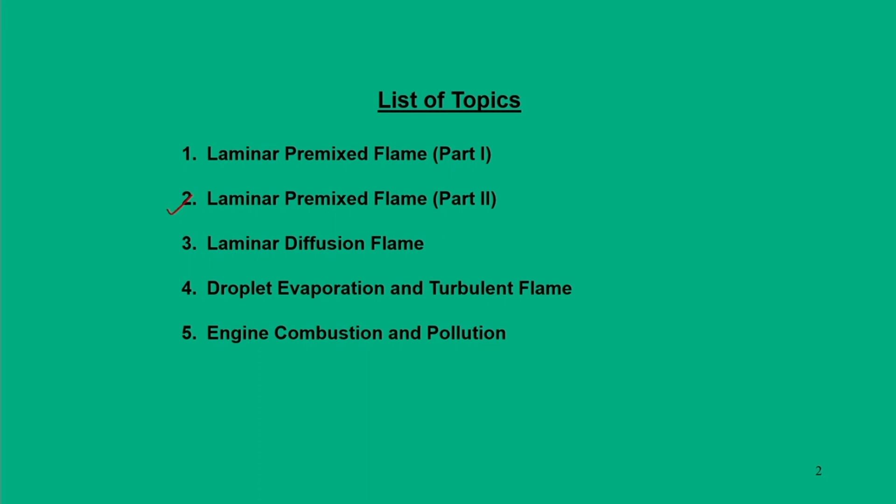In the first lecture of this module, we discussed laminar premixed flame part 1. Today we will move on to important aspects of laminar premixed flame part 2. In lecture number 29, we will discuss quenching, flammability limit, ignition and flame stabilization. The viewpoint of this lecture is that we expect the flame to be self-sustained, meaning the flame whose thickness is very small carries forward the mass and fuel reactions further if it has to be self-sustained.

At the same time, so that we can use it for a variety of applications, we should not be in a position where the flame creates any hazardous situations. One such situation is explosion. In some cases flame travels much faster, so to control those conditions we also need to know what is quenching. We should design our burners such that the flame moves forward, it should not come backward. There is a parameter called quenching distance.

Second thing is flammability limit. We should know that for a given fuel-air mixture, what is the range of equivalence ratio - minimum which is in the lean range or maximum which is in the rich range - during which the flame is able to sustain. So we should know the flammability limit.

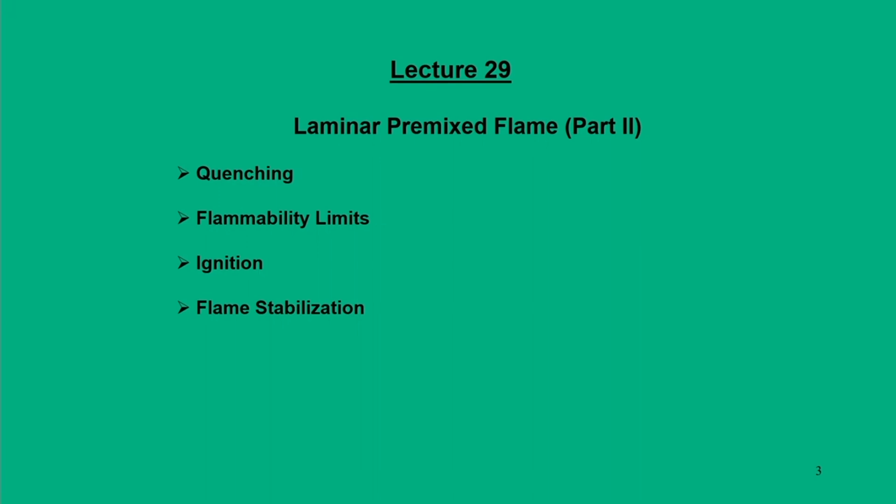Third point is ignition. If you have fuel and air without some kind of ignition, meaning we are not adding enough energy to the fuel for its combustion to happen, ignition is required to ignite the fuel and air mixture. After knowing all these things, we also expect the flame to be in a stabilized mode, meaning we make use of this flame for combustion applications only when we are very sure about the stabilization of the flame, which gives hazard-free operations.

So let us discuss them one by one. The first thing we will discuss is flame arresting methods, which means we should know under what circumstances the flame should not propagate further. If we know these conditions, it is possible for us to design suitable burners and avoid dangerous situations such as explosions. If you know how to arrest the flame, then we can extinguish the flame as and when required.

There are many techniques by which flame can be extinguished, such as when you allow the flame to pass through a narrow passage. While the flame enters a narrow passage, the fuel and air mixture does not have sufficient quantity. If they are unable to pass, then the flame terminates then and there.

In other cases, like addition of diluents - if you add water into fire, the fire stops. Addition of diluents causes primarily a thermal effect. Also, addition of suppressants like halogens alters the chemical kinetics. So all these things - we can add chemicals to the flame so that we can extinguish it.

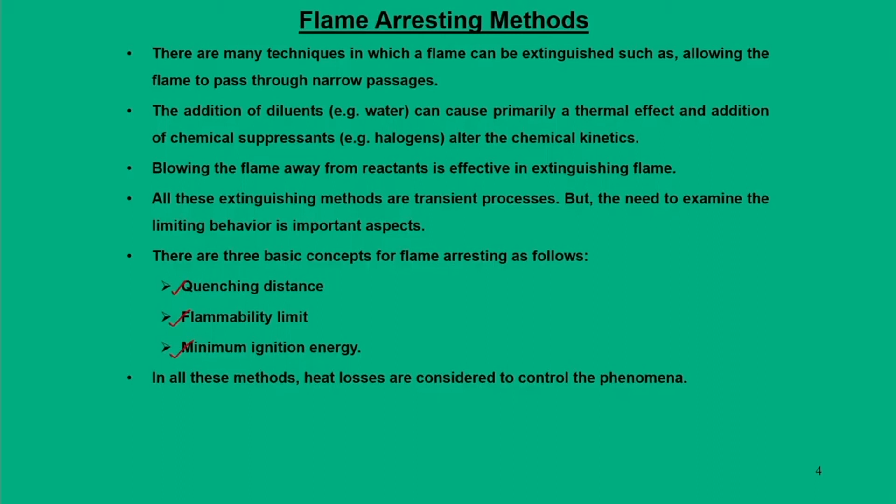Another way is simply blowing away the reactants, which is another method of extinguishing the flame. In fact, all these extinguishing methods are transient methods, but we need to examine their behaviors. To do that, we need to know three basic concepts: first is quenching distance, second is flammability limit, third is minimum ignition energy. These three parameters are vital for two dual purposes - we should avoid dangerous situations if we know how to extinguish the flame, and also we should be able to create an environment for flame stabilization. So for both scenarios, these concepts are very important.

So let us start with the first thing, which is called quenching analysis. The first parameter of flame extinguishing is quenching. In general, flames extinguish upon entering sufficiently small passageways, and if it is not too small, the flame will propagate further - meaning the flame has sufficient strength, or the air and fuel mixture has sufficient strength or pressure to move further. When you look at these flames, there are basically two types of burners: one is slot burners, which have a square or rectangular cross section, and the other conventional way is circular tube burners.

If you stick to a circular tube, the critical diameter of the tube where the flame extinguishes rather than propagates is known as the quenching distance. So basically, the quenching distance is defined as the diameter of the circular tube where the flame extinguishes.

Flame extinguishes means that is the minimum diameter of the tube that should be there so that the flame should extinguish. I will talk about the importance of this extinguishing at a later point in the slides. Based on this quenching distance, we can determine whether the flame is stabilized above the tube or flashes back. This is important because by the quenching distance we can visualize that the flame should propagate and should not traverse back through the tube, because when it traverses back it can come back to the location where the fuel-air mixture or source of fuel is.

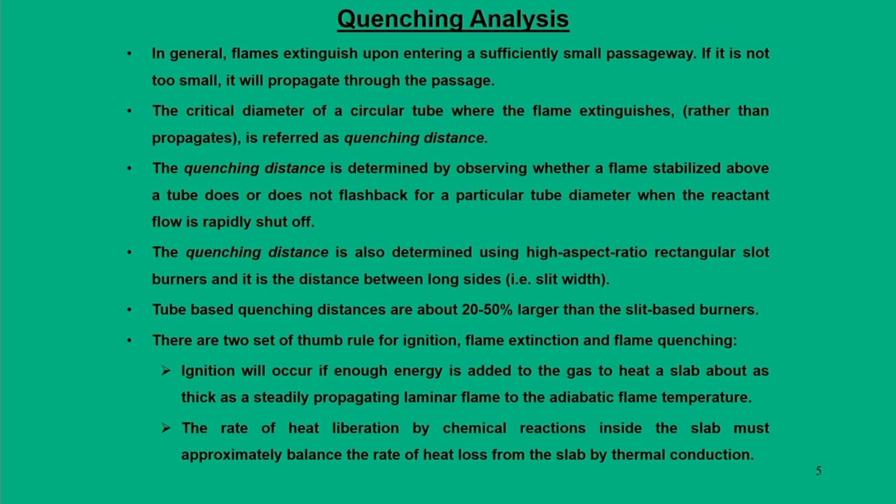With this concept, let us give some mathematical insight into the quenching distance. If we refer to this figure, we are looking at a flame that enters the slot of diameter d, and this flame has thickness delta. So this we say is a flame.

Within this flame, the entire volume in which the flame is produced, and all the energy generated within this volume, has to be dissipated through the slab, or to the walls of the slab, through conduction. Then we define the adiabatic flame thickness — when the flame has reached maximum temperature — as delta, and the quenching distance d can be calculated that satisfies the criteria of heat balance.

This quenching distance of the flame is always greater than the flame thickness. So if you see, the flame thickness is delta, and this quenching distance, which is d, has to always be greater than delta. This is the first criteria.

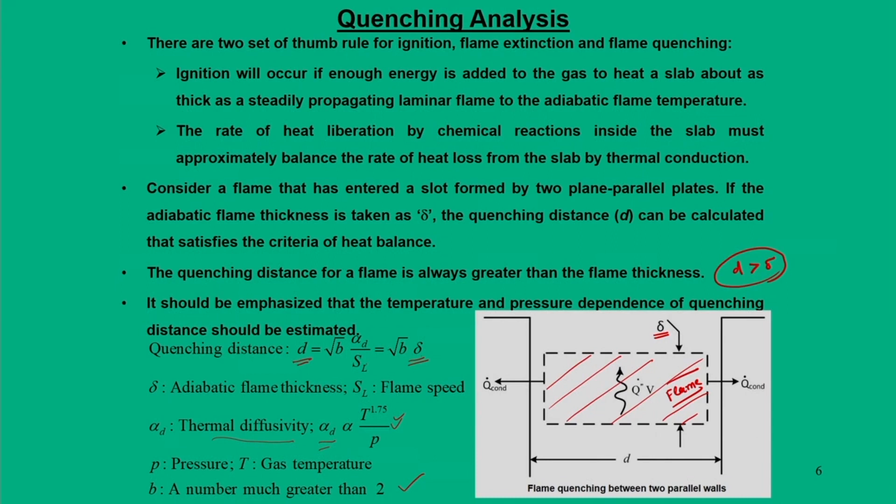The next aspect we are going to discuss is the flammability limit. We know that a mixture is rich or lean, and that is decided by the equivalence ratio phi. Equivalence ratio decides whether the mixture is rich or lean. We should also know that during this rich or lean mixture, what is the range within which we can have a self-sustained flame, and that parameter is called flammability.

For example, if phi is the equivalence ratio, there is a lower limit phi minimum and an upper limit phi maximum, and this is what we call the flammability range. The minimum range falls in the lean zone and the maximum limit falls in the rich zone. So for a given air-fuel ratio or equivalence ratio, we have a flammability range by which we can decide whether we can have a self-sustained flame or not, and that range we call the flammability limit.

The lower limit, phi less than 1, allows steady flame propagation, the upper limit, phi greater than 1, is the richest mixture. The flammability limit is quoted by the percentage of fuel by volume in the mixture or percentage of stoichiometric fuel requirement.

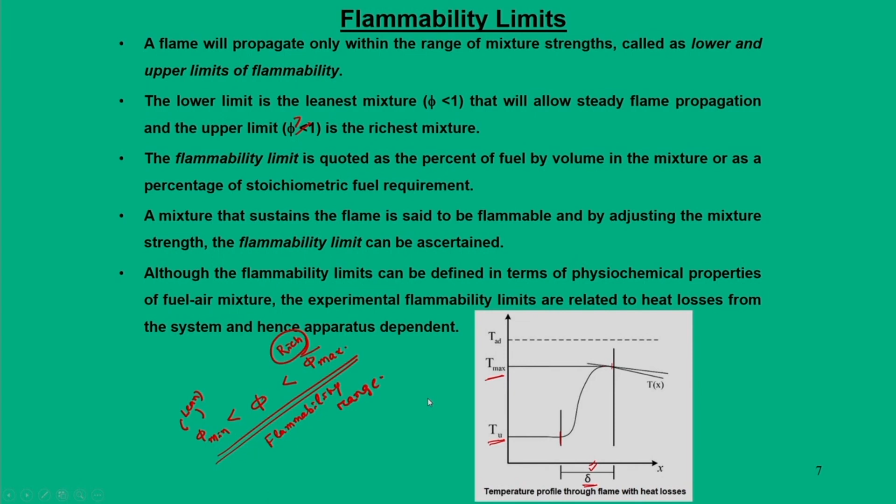After this we can clearly see a drop in temperature, mainly due to the cooling of the gas, meaning heat is lost by conduction from the flame. The cooling product gas creates a negative temperature gradient at the rear of the flame zone, which means heat is lost from the flame.

When sufficient heat is removed, the quenching criteria is satisfied, so the flame ceases to propagate, meaning it does not move further. If more and more heat is taken away from the flame, it does not have the strength to propagate further, so it extinguishes. The flammability limit decides the maximum temperature the flame can attain, and at the same time whether a sustained flame can remain or not.

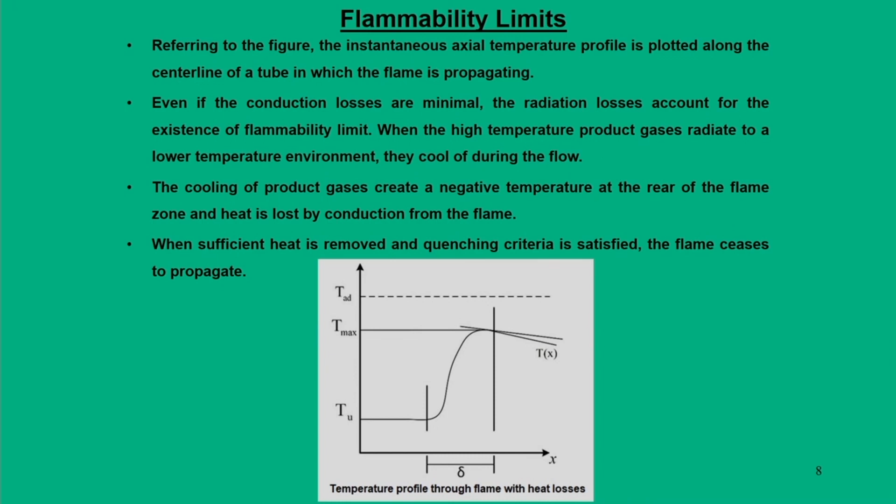The next important topic of discussion is ignition. The act of causing a fuel and air mixture to start burning is referred to as ignition, and we normally refer to ignition with respect to spark. In spark ignition engines, there is a spark plug through which we ignite the fuel. This ignition is impulsive in nature; all of a sudden, within a very small period of time, we dump enough energy into the fuel so that it can ignite.

When ignition takes place, we say that we have added enough energy to the gas for producing a steady propagating laminar flame. Because of this we introduce the concept of minimum ignition energy. In a simplified analysis, we consider a situation with a spherical flame within which we generate a certain amount of energy, and that energy has to be taken away, which we call Q conduction.

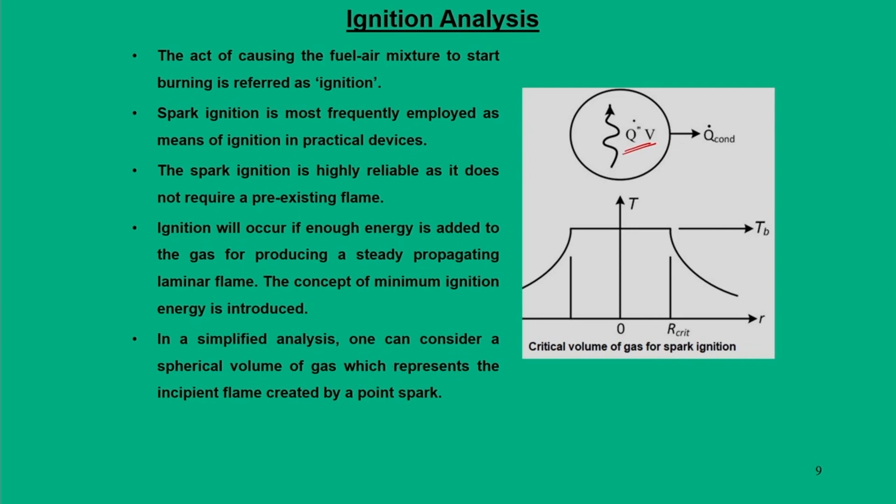So what we are looking at is whether by creating the spark we are able to give sufficient energy. To do that we can find a critical gas volume radius, defined such that flame will not propagate if the actual radius is smaller than the critical value. In other words, for a flame propagating situation, it has enough energy to propagate further, while there is heat loss from the flame through conduction. So a balancing approach is to find a critical volume radius at which the flame will not propagate further.

That analysis gives us the amount of energy, which we call the minimum ignition energy, needed to be supplied by the spark to heat the critical volume of the gas from its initial temperature Tu to the flame temperature Tb. So we can define this minimum ignition energy expression.

There are mathematical treatments available in the book, but what I have taken here is the end result. For a spherical gas volume we find the critical radius, which is a function of the thermal diffusivity alpha, flame speed, or in other words expressed in terms of flame thickness. Based on this we also have expressions for minimum ignition energy, given by: 61.6 times P Cp by Rb, bracket Tb minus Tu by Tb, into alpha d by Sl to the power 3.

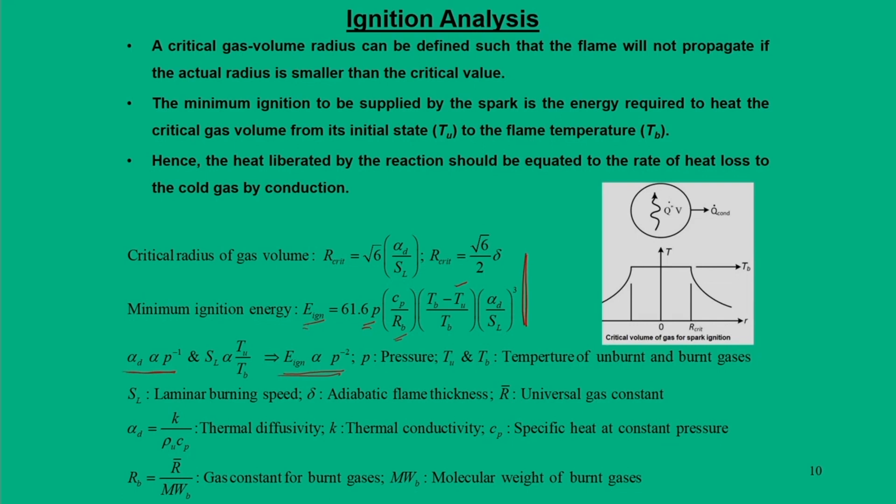From these expressions, the important thing is that ignition energy has a direct dependence on pressure, but an indirect dependence on alpha d. Experimental observations show alpha d, thermal diffusivity, is inversely proportional to pressure, and from this we can say ignition energy is inversely proportional to the square of pressure. So higher pressure means less ignition energy, meaning the flame has sufficient strength to move further. This gives the conclusion that we can find the critical radius, expressed in terms of flame speed as well as the flame thickness delta.

Minimum ignition energy is the energy added by the spark that heats the critical volume to the burnt gas temperature. The effect of pressure on minimum ignition energy results from both direct influence and indirect influence buried in the thermal diffusivity and flame speed. The combined result shows that minimum ignition energy is inversely proportional to the square of pressure. So this is how we get these expressions.

From this expression, if you have an increase in the mixture temperature, it results in a decrease in the ignition energy. That means if your mixture temperature is higher, we require less ignition energy.

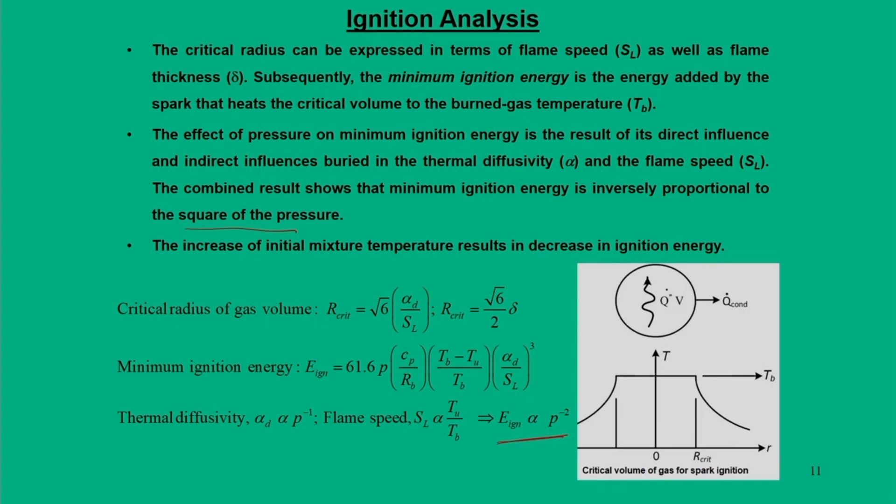The next important aspect we are going to discuss is flame stabilization. In all our previous discussions, we mainly focused on how to arrest the flame, meaning we were focused on safety hazard concerns so that explosion should not occur. To do that, we should know the flammable range, how much energy is required, and what the quenching distance is, all these parameters are required.

But the other side of the story is if you view it with respect to a gas burner, such as cooking stoves, where the fuel comes from the cylinder through a tube and receives air from the atmosphere, with the burner at the top, so this flame starts burning.

Two important design criteria for any kind of gas burner are flashback and lift off. Flashback means that once the gas is released from the fuel source, that is from the cylinder through the tube, it should travel further, and when it reaches the burner and suddenly if the fuel supply is stopped, the flame which is supposed to be in the burner tries to traverse back, but it cannot, because the burner tube has been designed to follow the quenching criteria.

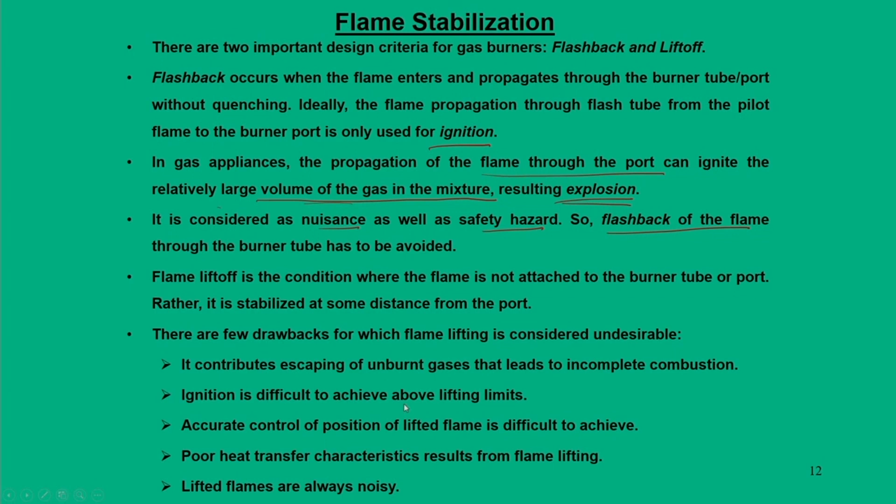Again, ignition is difficult to achieve above this lifting limit, so we need to control the actual position of the lifted flame, which is difficult to achieve. During lift up, poor heat transfer characteristics can result from flame lifting, and lifted flames are always noisy. Because of these reasons, we expect that the flame should not get lifted up.

Now let us understand why flashback occurs. If you look at how flashback happens, there are two speeds that control the motion of the flame: the flame speed at which the flame moves ahead, and the gas velocity that pushes the flame further. These two things together allow us to have a steady flow laminar flame.

Because of this mismatch in local velocity, flashback can happen. When the local flame speed exceeds the local velocity, the flame propagates through the tube - that is quite natural. But as the fuel is cut off, the flame traverses back to any tube size larger than the quenching distance. For example, if the flame sees a larger tube diameter than the quenching distance, instead of moving further, the flame tries to come back, and explosion can happen if the tube size is not designed as per the quenching distance.

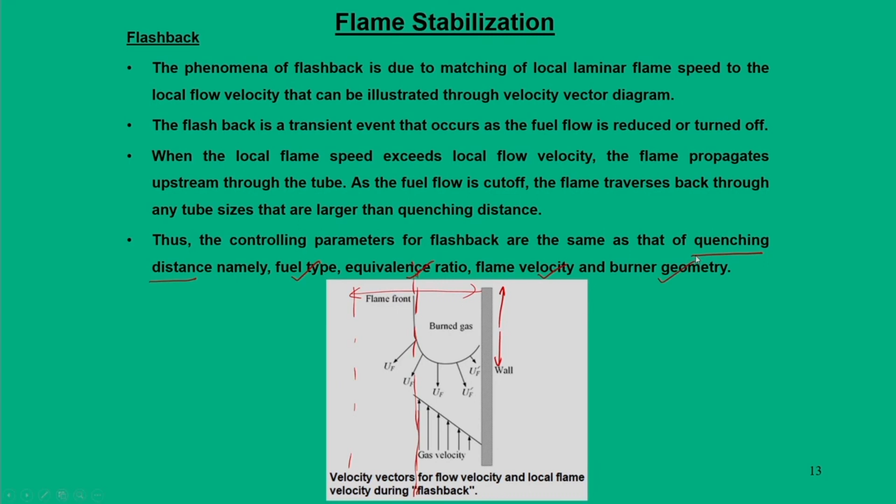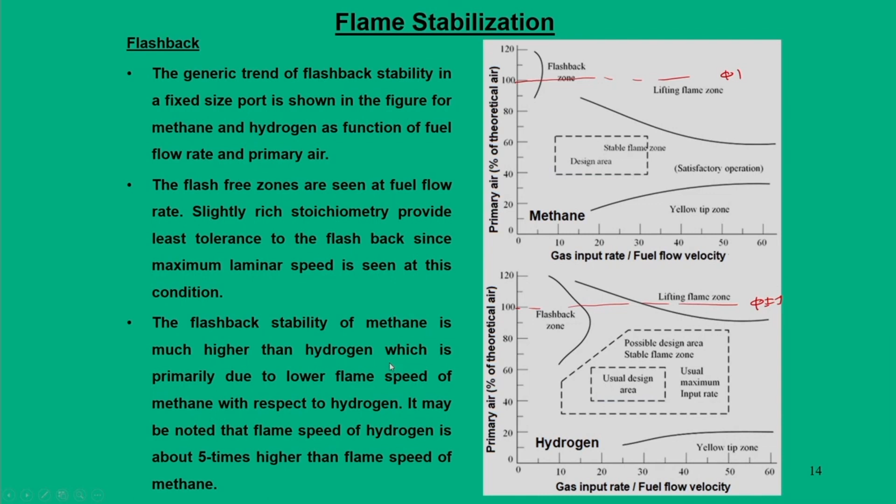The flashback-free zones are seen at fuel flow rates slightly rich of stoichiometry, which provide least tolerance to flashback, since the maximum laminar flame speed is seen at these conditions. Another important point: flashback stability for methane is higher than that of hydrogen, because methane has a lower flame speed with respect to hydrogen. It may be noted that the flame speed of hydrogen is about 5 times faster than the flame speed of methane.

The next important aspect is lift-off. We expect that the flame should sit on the burner foot, not get lifted. To understand why the flame gets lifted, consider this figure, which shows half of this burner tube, where the least gas velocity is 0 and the maximum is at the centerline velocity, and the nature of the flame can be seen through this profile. Now, what happens during lift-off?

If you look at this velocity vector diagram, during lift-off there is a mismatch, meaning gas velocity has lifted the flame above, and diffusing air enters into this domain. There are two important aspects to understand here: as the flame velocity increases, we can correlate the local angle alpha with respect to the flame speed as well as the unburnt gas velocity.

When the flame velocity increases, the cone angle of the flame decreases. Because of this, the edge of the flame is displaced by a small distance downstream, and due to this imbalance and change in angle alpha, the flame moves downstream, which we call lift-off. With further increase in flow velocity, a critical velocity is reached where the edge of the flame jumps to a new position and the flame is said to be lifted. Further increase in fuel velocity beyond the lift-off value results in a higher lift-off distance, until at some point the flame becomes abrupt.

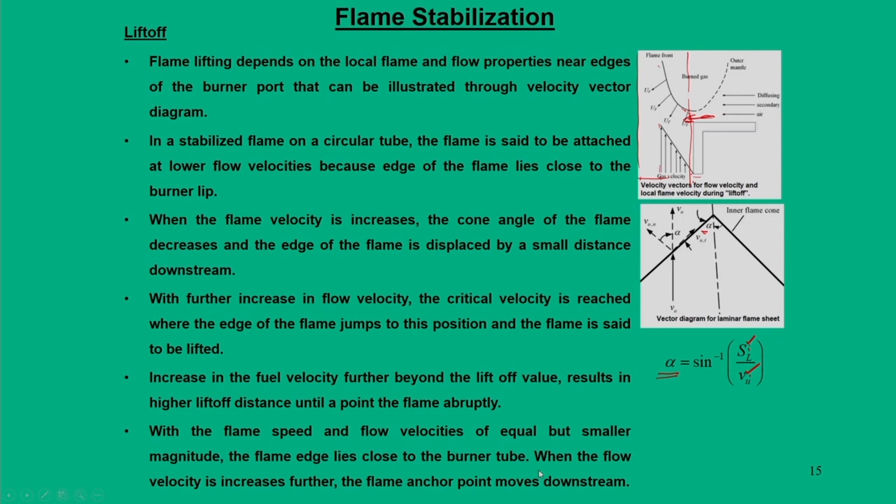With flame speed and flow velocity of equal but smaller magnitude, within this critical limit, the flame tries to make a balancing approach, so the flame edge lies close to the burner tube. But when flow velocity increases further, the anchor point moves downstream again. So subsequent increase in flow velocity causes the flame, to its best possible extent, to adjust with respect to downstream conditions, because there are two counter effects when it lifts off: one is decreased heat radiation loss to the burner tube, the other is increased dilution with ambient fluid, since the ambient fluid tries to enter through this lift-off distance.

When ambient fluid tries to enter, and we have enough gas velocity that goes away without being ignited or burnt, these two things cause the flame to lift up. In other words, the flame front sees an adverse phenomenon where it feels a push from the local gas velocity, so it stands at a certain distance.

How much this distance is depends on many factors. Two important factors are heat lost to the burner tube, and increased dilution of ambient fluid.

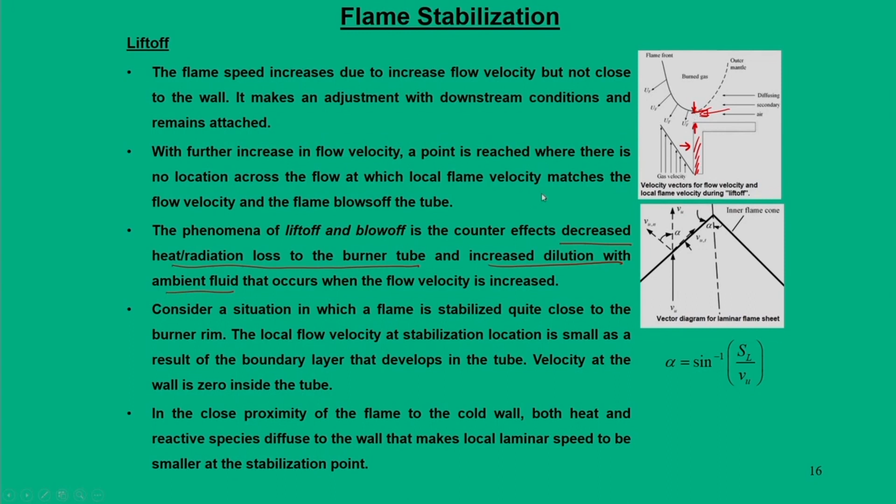In the close proximity of the flame to the cold wall, both heat and reactive species diffuse to the wall, which makes the laminar speed smaller at the stabilization point. The heat from the flame has to go to the wall of the tube, but since the flame gets lifted up and at the same time diluent fluids or secondary air enter into the lift-up zone, because of these two effects the flame stands at a distance, which we call the lift-off distance.

The next important thing is to recall the same figure to see what the lift-free operations look like. In the similar philosophy of the flashback zone, we also have another trend, this graph for methane, showing a satisfactory operation region for the flame lift-off zone.

By regulating your input gas or fuel flow supply, along with the theoretical air required for a sustained flame, if you keep increasing the fuel velocity, there is a particular range for which we need a stable flame. When I say flame is stabilized, it means we have crossed the flashback zone, and also ensured the flame does not lift away from the burner. When these two conditions are satisfied, we get a design area of stable flame zone.

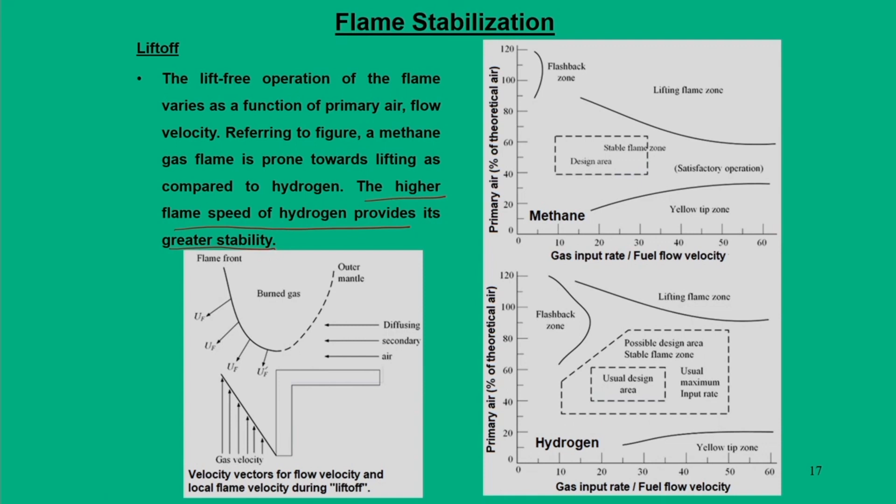Now we are in a position to discuss some numerical problems based on what we've understood so far. The first problem is about the design of a laminar adiabatic flame burner, where we expect to have a flat flame. It consists of thin wall tubes.

If you recall one of our pictures, this is a case for an adiabatic flat flame burner in which fuel-air mixture comes through it, with some glass balls or preheated zones. The charge that enters goes through tube bundles. Looking at the top view, we can see circular tubes of equal diameters, all filled with the charge or fuel-air mixture.

The question is to find the diameter of the tube. We require the diameter of each tube so that we can have a flat flame, with the condition that we have a laminar adiabatic flame, and the burner operates at stoichiometry at 310 Kelvin and 6 atmospheres. We need to find two things: first, determine the mass flow rate per unit cross-sectional area at the design conditions; second, estimate the allowable tube diameter to avoid flashback.

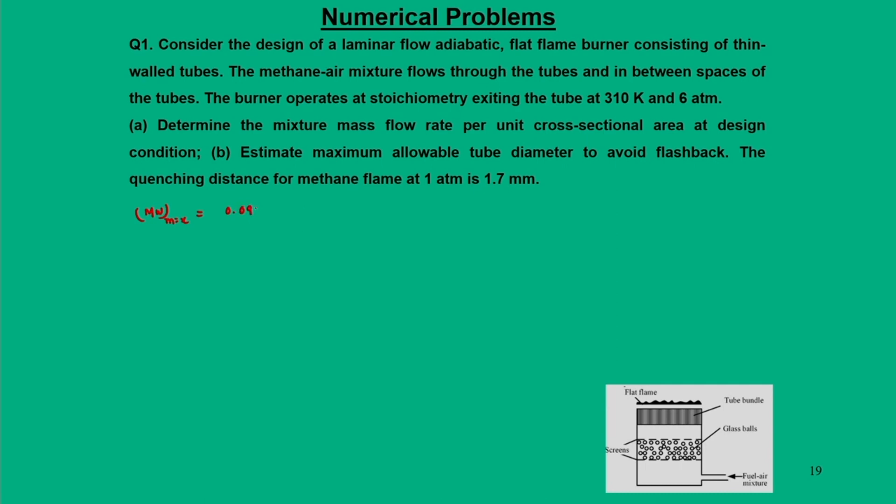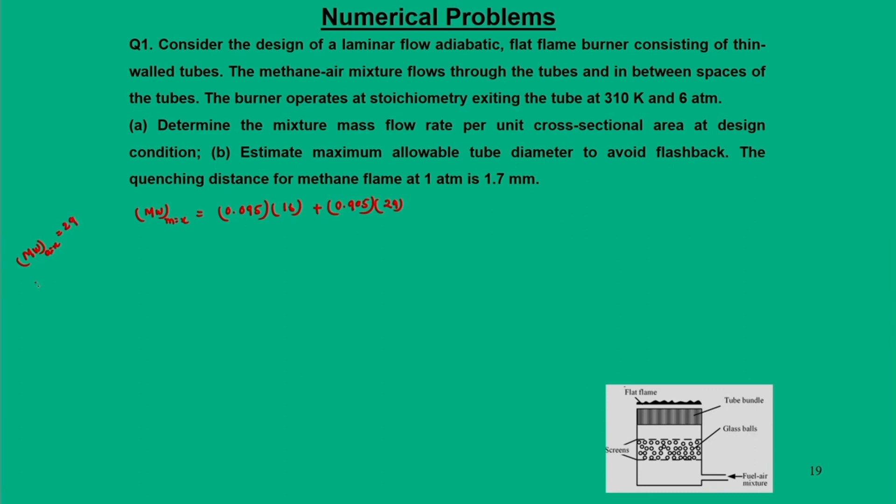Then we can find the molecular weight of mixture, that is equal to 0.095 times molecular weight of methane, which is 16, plus 0.905 into molecular weight of air, which is 29. So molecular weight of air is 29, molecular weight of methane is 16, so this number is 27.765.

Once we know this molecular weight of mixture, this will give rho u is equal to 101,325 into 6 atmosphere divided by 8315 divided by 27.765 into T is 310. So this number is 6.55 kg per meter cube.

So for the first question, we can find m dot double dash is equal to 6.55 into 17.55 by 100. We divide by 100 to convert flame speed into meter per second. So this number is 1.15 kg per second per meter square. This gives the mixture mass flow rate per unit cross sectional area.

The second part is we need to find the maximum allowable tube diameter. For that we recall our relation: d, the tube diameter, is proportional to alpha d divided by SL, and alpha d is also proportional to T to the power 1.75 divided by P. By combining these expressions, we can write d is proportional to T to the power 1.75 by P, into 1 by SL.

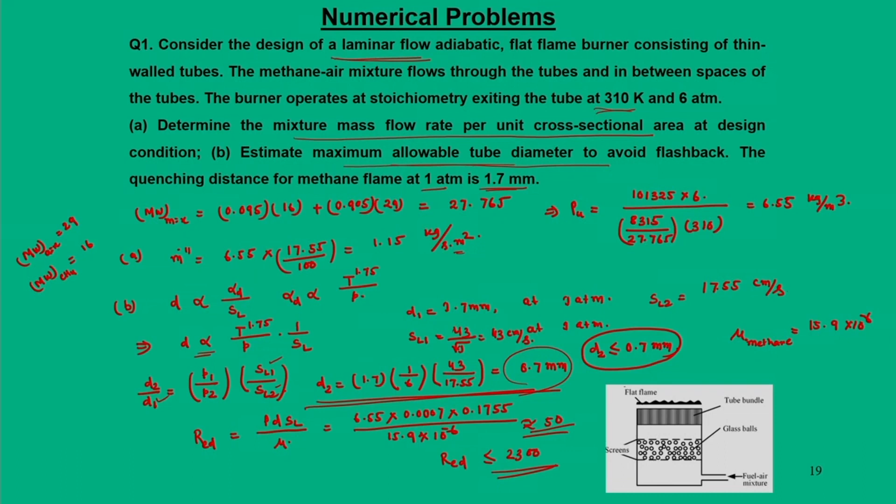By ensuring the flame speed and gas velocity, it is a flat burner, and based on this we also find the quenching distance with respect to tube diameter. So this particular concept gives the idea how the diameter of the tube is to be designed so that flashback should not occur. And the second problem is about the flammability limit.

So what we have is that a full propane cylinder is there in a room, it contains 0.5 kg. The room size is 3 meter into 3 meter into 4 meter, and room condition is 1 atmosphere and 20 degrees centigrade. So after a long time the fuel gas and room air is completely mixed.

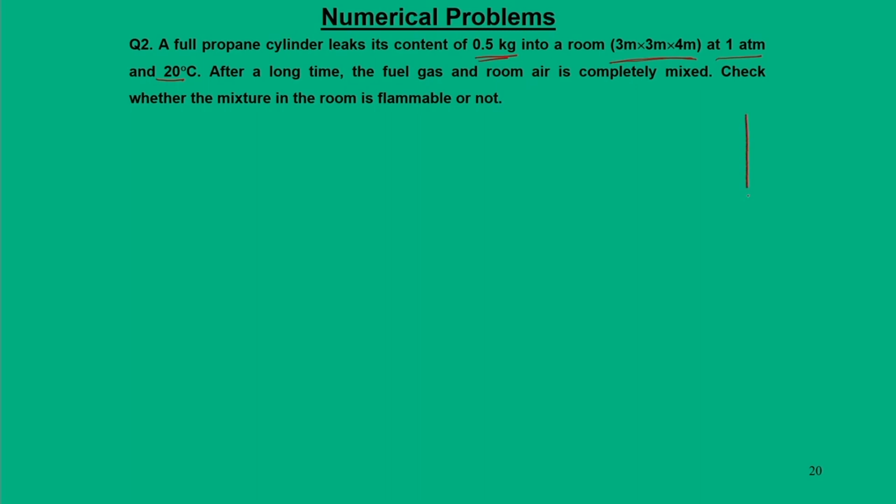So we have a room in which we have a gas cylinder, gas is leaking. So we expect whether the mixture is flammable or not. So while leaking it mixes with the room air. To do that, first thing we should know the flammability limit.

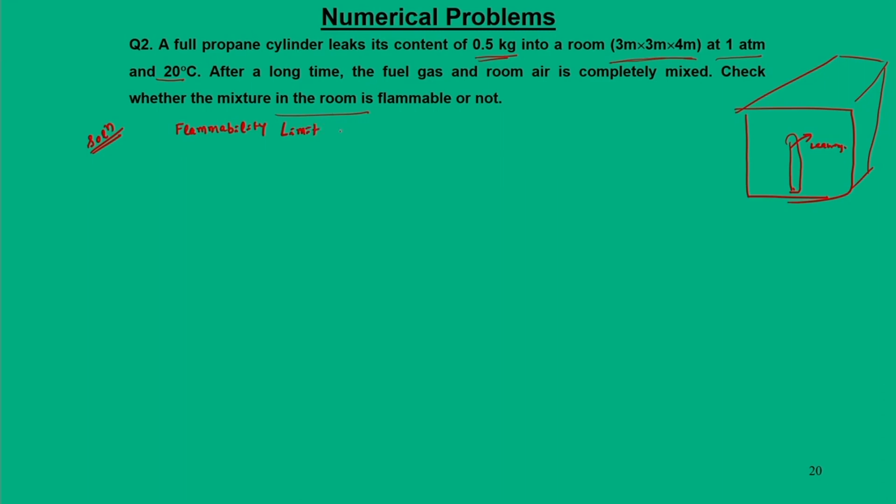For propane, this limit we can get it from the book, and for us we say phi minimum is less than phi maximum, and for propane this phi minimum is 0.51 and phi maximum is 2.83. So our problem is that if we find phi, if it falls within this range, then we will say it is flammable. If it is not, it is not flammable. So this is the question.

To do that, we have to simply find out the partial pressure PF for fuel. This can be found out from the ideal gas equation. If you recall, PF into V equals mass of the fuel into R bar by molecular weight of fuel into T. So what we know is MF, which is 0.5 kg, R bar is 8315 joule per kg mole Kelvin, T is 20 degree centigrade, 293 Kelvin.

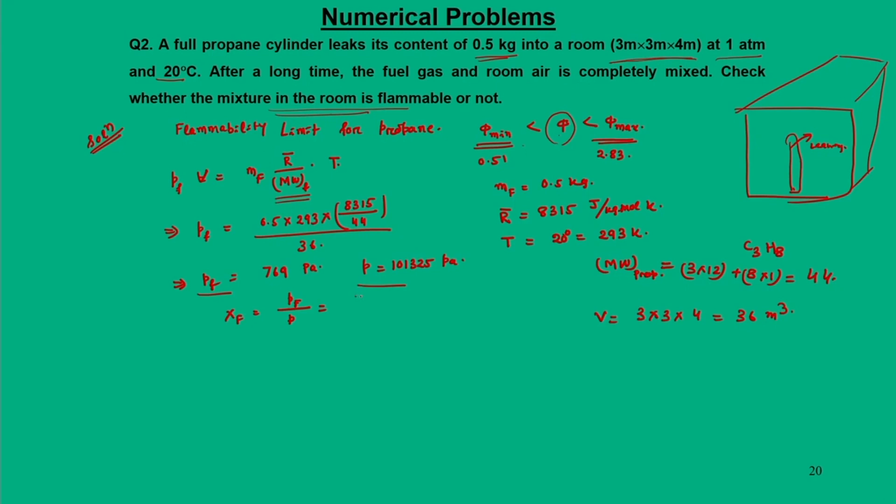So from these two things we can find out mole fraction, that is Pf by P, and this number is 0.0076. So mole fraction of the fuel - what will be mole fraction of air? It is 1 minus 0.0076, this number is 0.9924. Now from these mole fractions we will be able to find air fuel ratio.

That air fuel ratio is X air into molecular weight of air divided by X fuel into molecular weight of fuel. So this number is 0.9924 into air is 29, molecular weight of the fuel is 44, and its mole fraction is 0.0076. So this number is approximately 86.

Then we also do not know what is the stoichiometric air fuel ratio, so we have to recall the propane reaction: C3H8 plus 5 into (O2 plus 3.76 N2) will give you 3 CO2 plus 4 H2O plus 5 into 3.76 N2. So this is the stoichiometric propane air mixture.

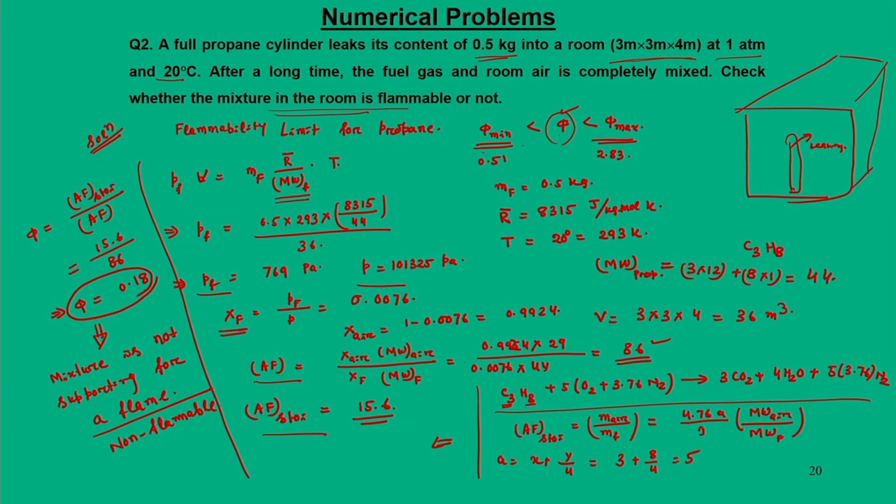Okay, so this problem gives you a very basic insight into whether a gas cylinder which is leaking in a room is flammable or not. So with these two problems, let me close today's discussion. Thank you for your attention.